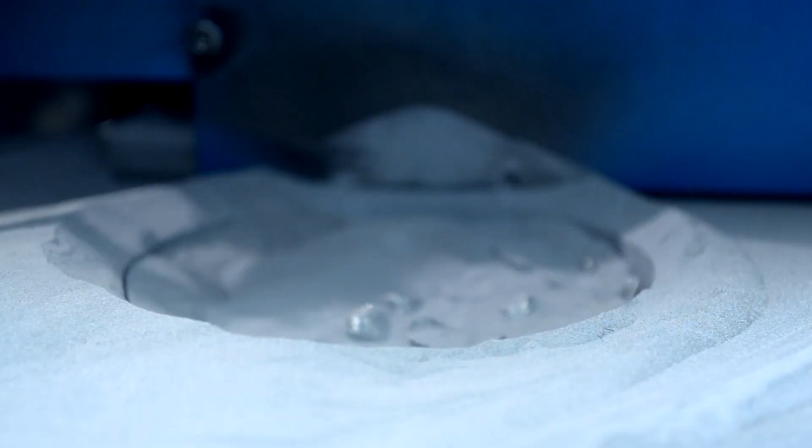Pittsburgh, the Steel City, once the epicenter of American steel production, with countless mills and foundries lining the city's landscape. It was the largest steel producer in the world. But the days of heavy industry have given way to a new era of innovation, and modern technologies are blossoming.

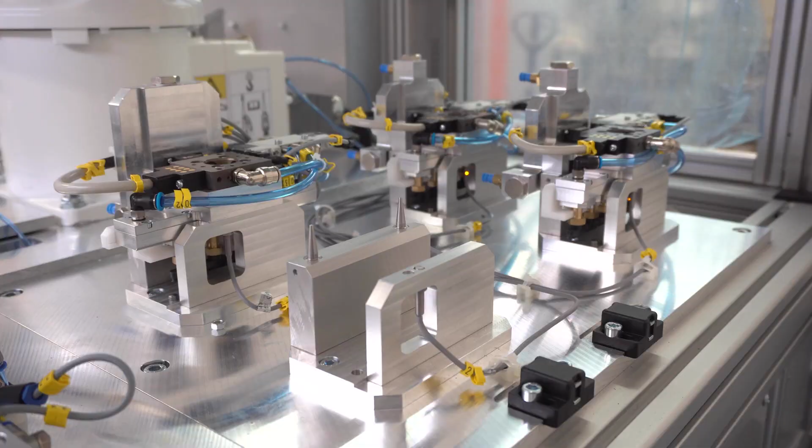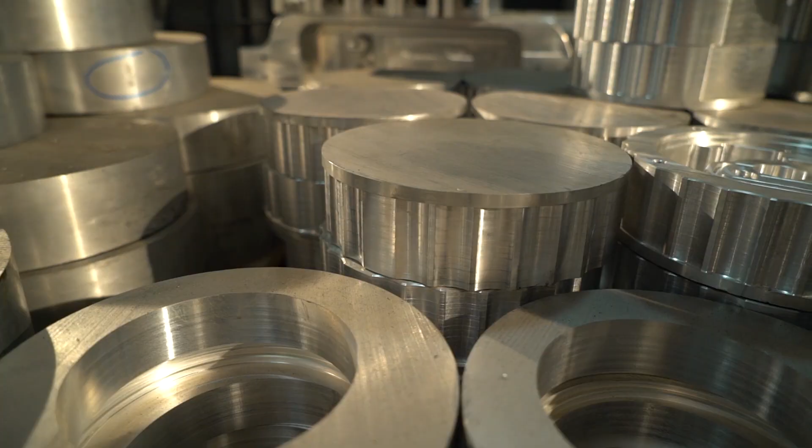Just like those early days of the steel industry in Pittsburgh, today's cutting-edge innovations are characterized by innovation and hard work. Backbreaking labor has been replaced with computer-aided sustainable technological advancements in manufacturing, utilizing novel design freedom that has enabled concepts to come to fruition.

Ladies and gentlemen, we proudly present several cutting-edge innovations that are the winners of the 2024 Powder Metallurgy Design Excellence Awards competition, sponsored by the Metal Powder Industries Federation. Let's start with the awards of distinction.

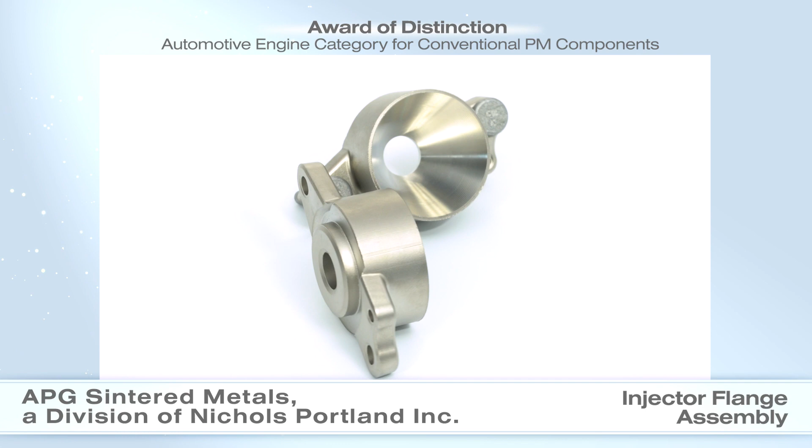APG Sintered Metals, a division of Nichols Portland Incorporated, received an award of distinction in the automotive engine category for conventional PM components for an injector flange assembly. This diesel exhaust fluid injector flange assembly is used in a mid-size pickup truck to reduce the amount of nitrogen oxide gas exiting the tailpipe.

Austenitic 304 stainless steel was selected for its combined good corrosion resistance and weldability. Due to the low compressibility of the powder, the parts are sintered at 1350 degrees Celsius in hydrogen to reach the final 7.0 grams per cubic centimeter density. Minor machining is required on the inner diameter and conical counterbore. After welding, the assembly does not leak when under pressure.

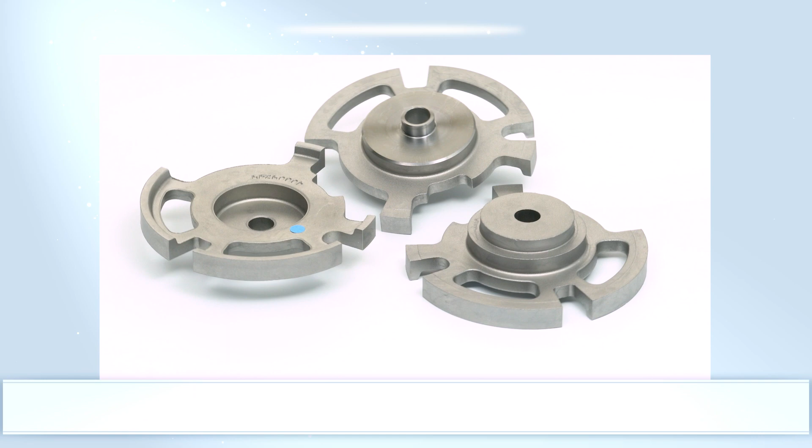AAM St. Marys Manufacturing Facility received an award of distinction in the automotive engine category for conventional PM components for a camshaft position sensor exciter wheel. Mounted on the camshaft of full-size pickup trucks and sport utility vehicles, the position sensor exciter wheel assists the cam sensor to input data to the engine control module to determine the camshaft position and velocity.

The FY-4500 iron phosphorus alloy has good magnetic properties, and only a turning operation is required to create the precision, thin-walled mounting hub and face. The PM process has better material utilization and precision compared with stamping, and the parts are acceptable for recycling as they do not contain copper.

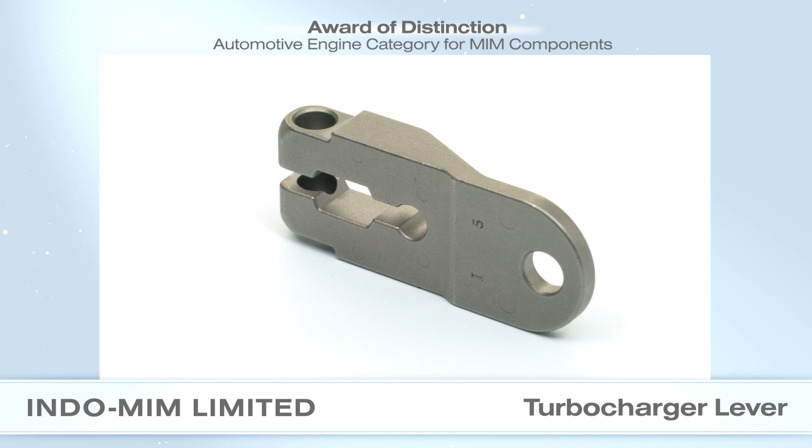Indo MIM Limited received an award of distinction in the automotive engine category for MIM components for a turbocharger lever. This lever is used as a gas flow controller in the turbocharger of an internal combustion engine. Originally specified as an HK30 austenitic stainless steel, the parts are made using MIM 17-4 PH precipitation hardening stainless steel and proved satisfactory for the application that requires corrosion resistance and high temperature properties.

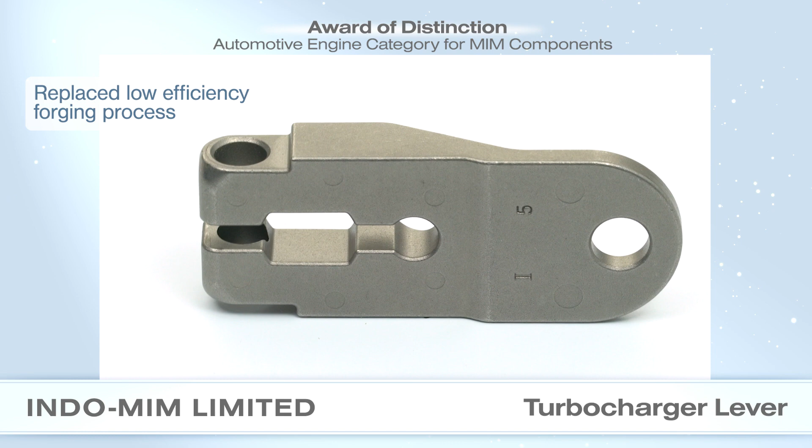MIM processing reduced lead times and was able to produce the high volume of parts needed weekly by the customer, while significantly reducing waste material compared with the forging process.

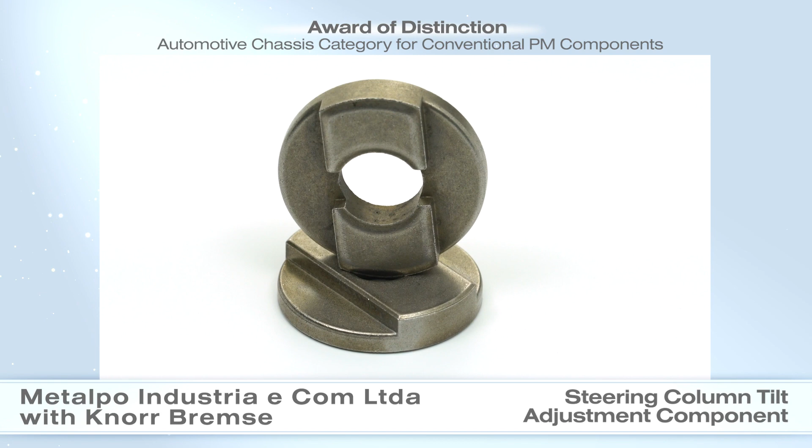Metalpo Industria e Comercio Ltda and customer Knorr-Bremse received an award of distinction in the automotive chassis category for conventional PM components for a steering column tilt adjustment component. Understanding the application to define the best fit between geometry, process, and requirement enabled a best cost benefit for this truck steering column tilt adjustment component.

When the carbonitrided PM part was unable to meet the dimensional tolerances, the material, design, and process were changed to a sinter-hardened FLC-4908 component with a density of 7.0 grams per cubic centimeter. Changing from traditional carbonitriding to sinter hardening reduced the carbon dioxide emissions by 156 kilograms.

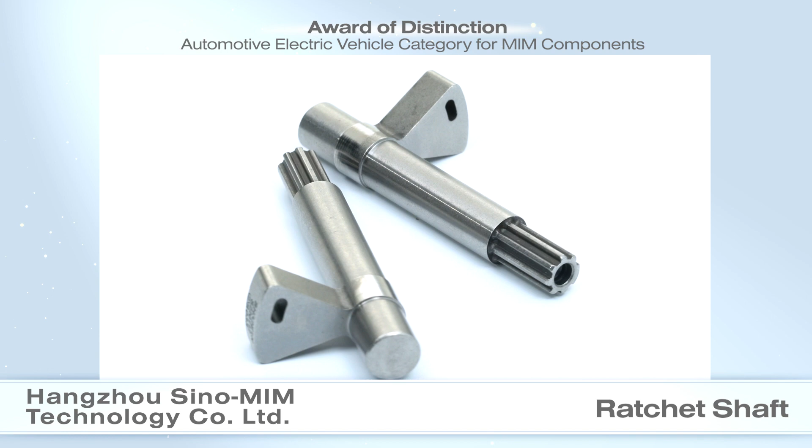Hangzhou Sino MIM Technology Company Limited received an award of distinction in the automotive electric vehicle category for MIM components for a ratchet shaft. Used in the parking brake system for new electric vehicles, the ratchet shaft engages a cam to lock the disc brake when parked.

The chromium molybdenum alloy steel has a tensile strength of 1400 megapascal and a yield strength of 1200 megapascal. Although the ratchet shaft requires minimal machining, the MIM part resulted in a 20% cost saving compared with a fully machined component.

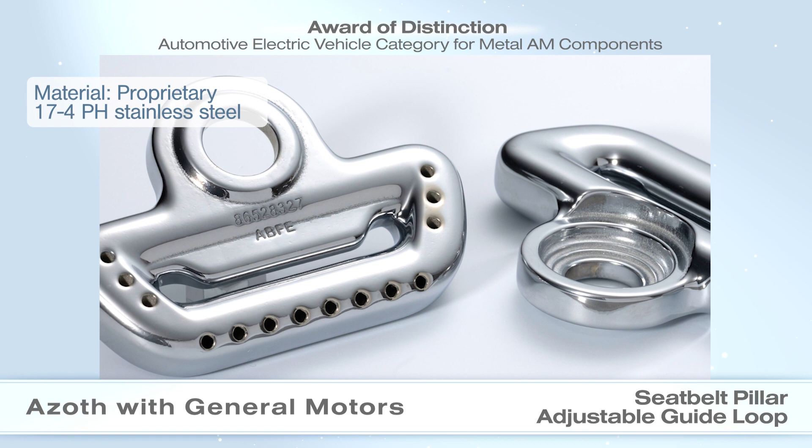Azoth and customer General Motors received an award of distinction in the automotive electric vehicle category for metal AM components for a seatbelt pillar adjustable guide loop. This seatbelt pillar adjustable guide loop was designed with binder jet AM processing in mind and includes a complex internal channel to reduce mass and material waste.

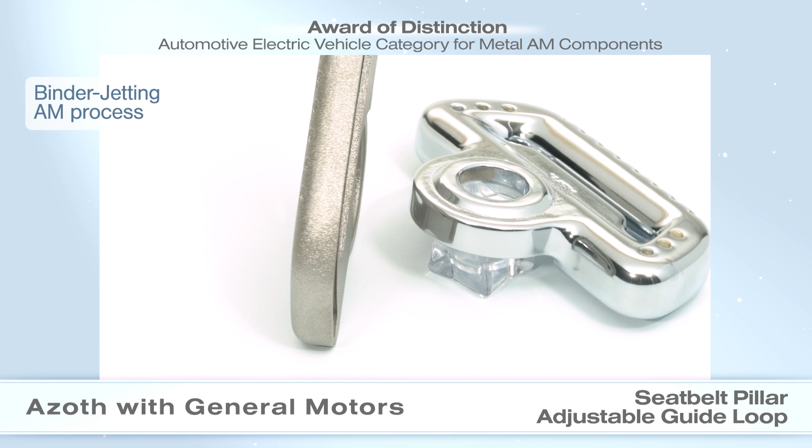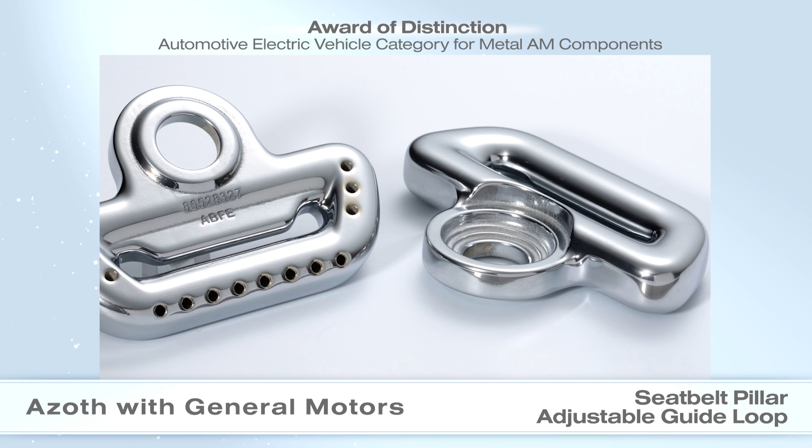The surface of the parts is semi-automatically polished prior to a multi-layer bright nickel chrome plating operation to improve corrosion performance and provide a hard, scratch-resistant surface. Parts are tested for cyclic corrosion resistance, thermal shock resistance, perspiration resistance, and resistance to cleaning agents. Prior to using AM processing, the component was an assembly of 4 separate parts.

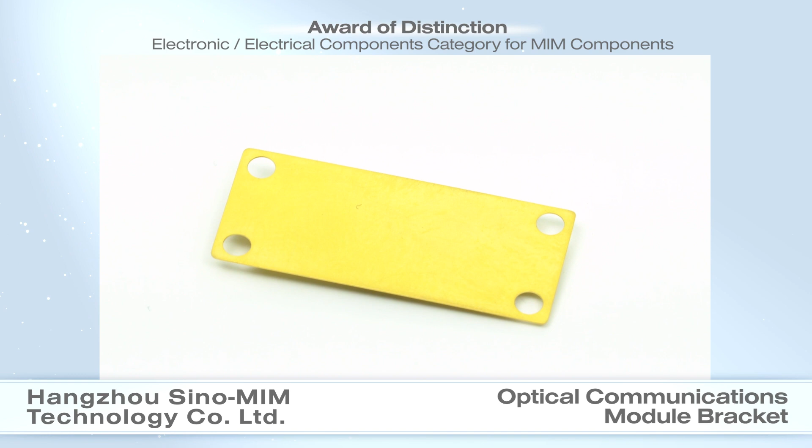Hangzhou Sino-MIM Technology Company Limited received an award of distinction in the electronic/electrical components category for MIM components for an optical communications module bracket. Used as a heat dissipation module in an optical communication 5G base station, numerous heating components are mounted on the bracket surface, which serves not only as the mounting base, but also conducts and dissipates heat.

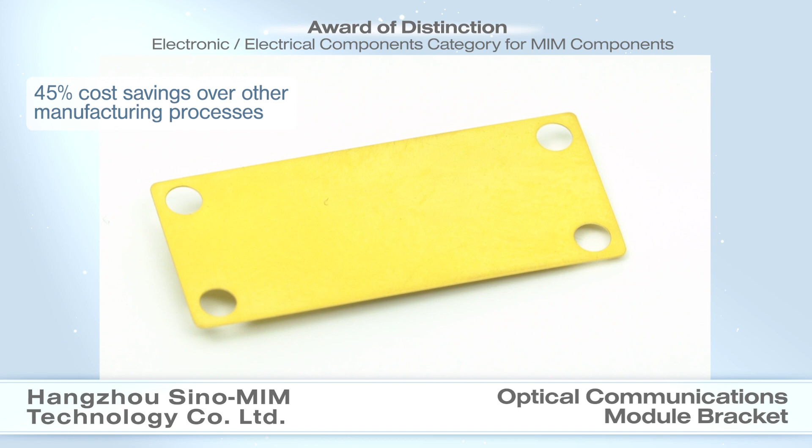This ultra-thin base plate has a flatness requirement of less than 0.03 millimeters. MIM processing cut the product cycle time for this electroplated 50-50 copper tungsten bracket while reducing the cost by 45%.

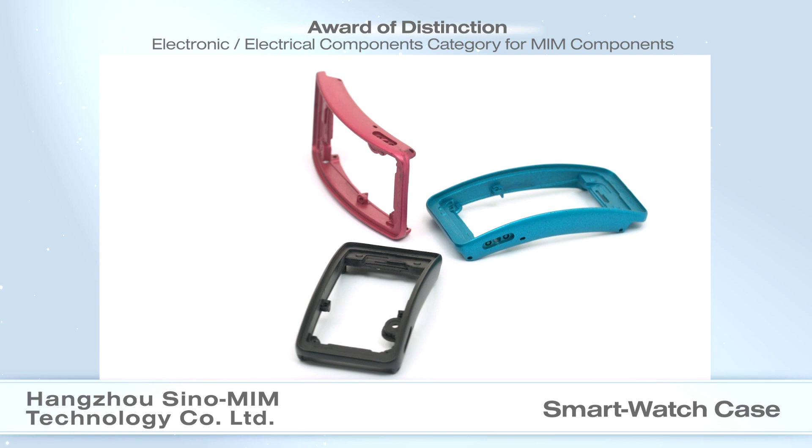Hangzhou Sino-MIM Technology Company Limited received an award of distinction in the electronic/electrical components category for MIM components for an aluminum alloy smartwatch case. The thin, complex sections of this aluminum alloy smartwatch case require use of a high-fluidity feedstock and a high-speed molding machine.

The curved surface of the watch cases necessitates manual polishing to a mirror finish, and the parts are anodized to various colors. The light weight of the aluminum alloy case, compared with ones made using stainless steel, is a significant benefit. The MIM technology has high material utilization and the advantages of lower cost over machining.

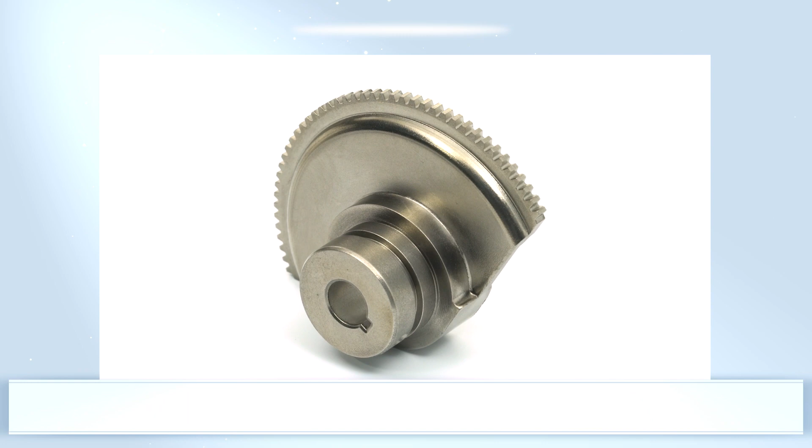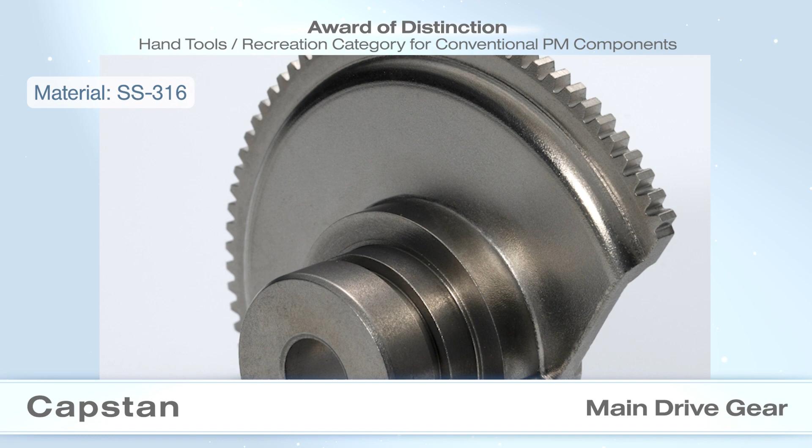Capstan received an award of distinction in the hand tools recreation category for conventional PM components for a main drive gear. This 316 stainless steel main drive gear is used in a throttle system with a stack-up of 3 stainless steel PM-driven gears. The compaction process achieved about 60% of the final shape of the part, and secondary CNC lathe

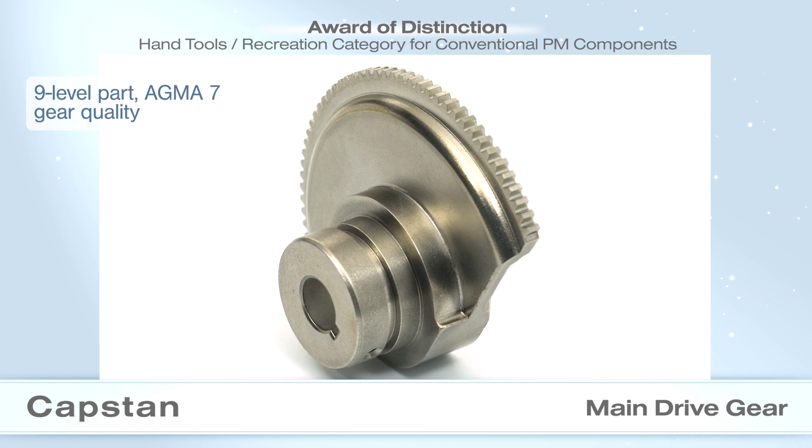turning and milling operations were used to achieve the bore depths, hub diameter, groove, and tapped hole. The PM part had a keyed form built into the compaction tooling, a distinct advantage compared with the previously machined wrought component. The finished gear is a 9-level part, made to an AGMA 7 quality level.

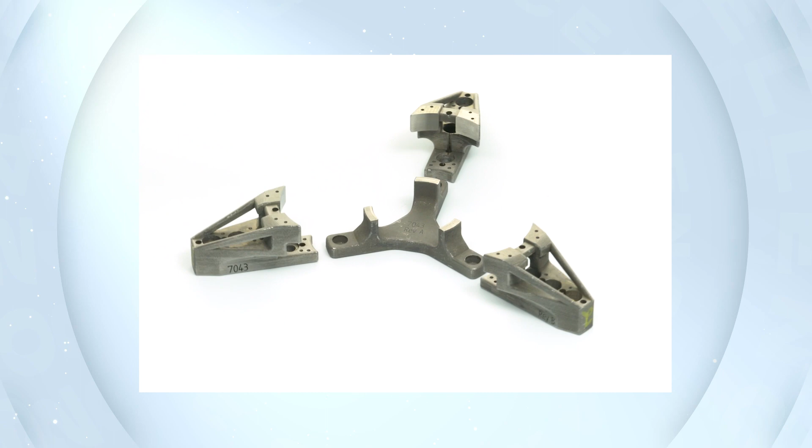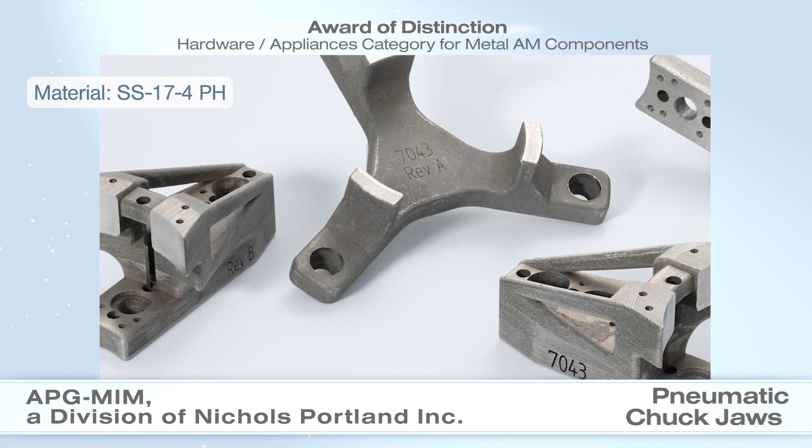APG MIM, a division of Nichols Portland Incorporated, received an award of distinction in the hardware appliances category for metal AM components for pneumatic chuck jaws. Compared with traditional work-holding chuck jaws, these lightweight jaws offer an 84% reduction in rotating mass and a fraction of the centrifugal force that the pneumatic chuck must overcome at full rotational speed. The lower centrifugal force requires a clamping pressure roughly a third of what a traditional chuck would require.

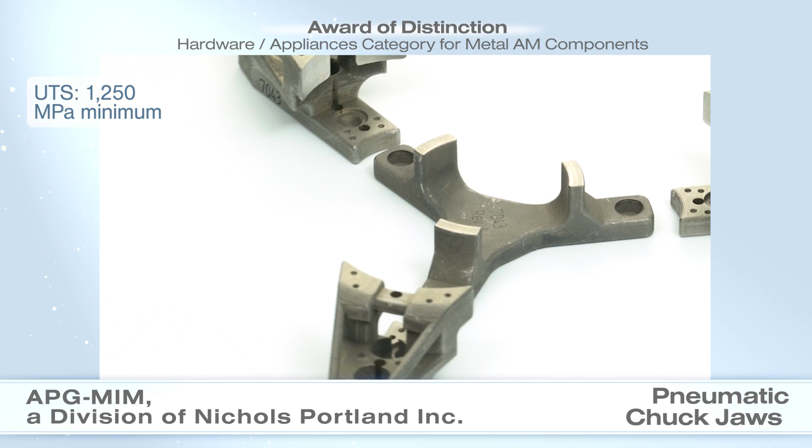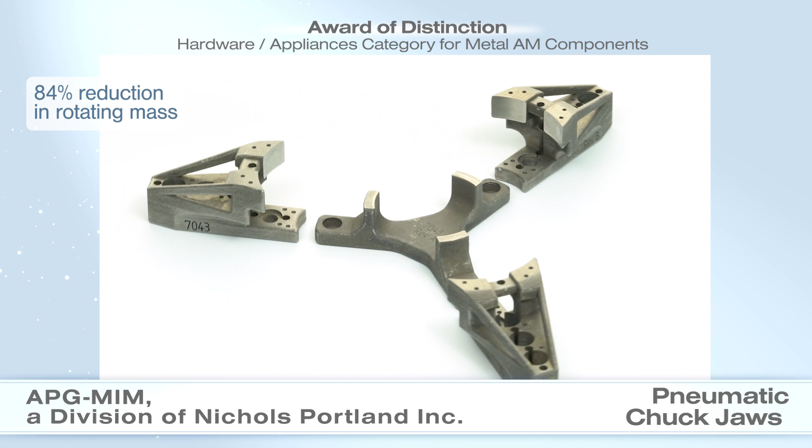Made using the material jetting process, the inner lattice structure is formed without having to depowder, eliminating the risk of free powder entrapment. The process generates little waste, and the wax used to form the mold is recovered and can be reused for a future build.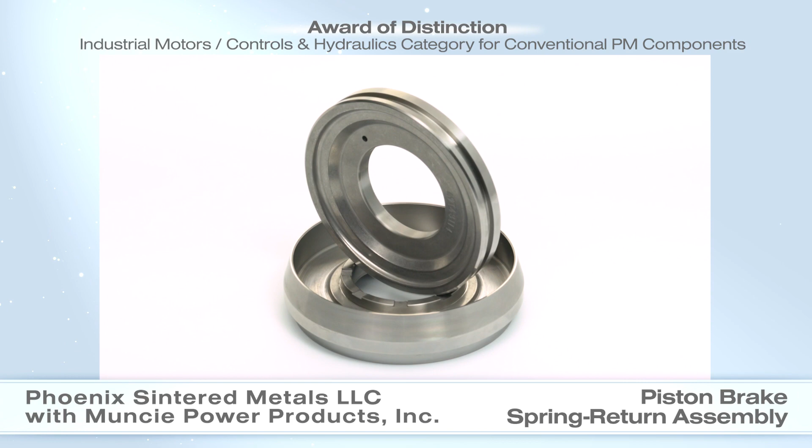Phoenix Sintered Metals LLC and customer Muncie Power Products Incorporated received an award of distinction in the industrial motors, controls, and hydraulics category for conventional PM components for a piston brake spring return assembly. Used in a power takeoff system in work truck applications, this unique design piston brake spring return assembly engages the clutch pack under pressure, and the taper feature acts as a brake when disengaged.

Both the piston and piston cup are made from FN0208 at a density of 6.9 grams per cubic centimeter. The ability to form the tone ring feature on the inner hub of the piston was a feature not available on the prior part design that was machined from bar stock, resulting in excessive scrap and machining cost.

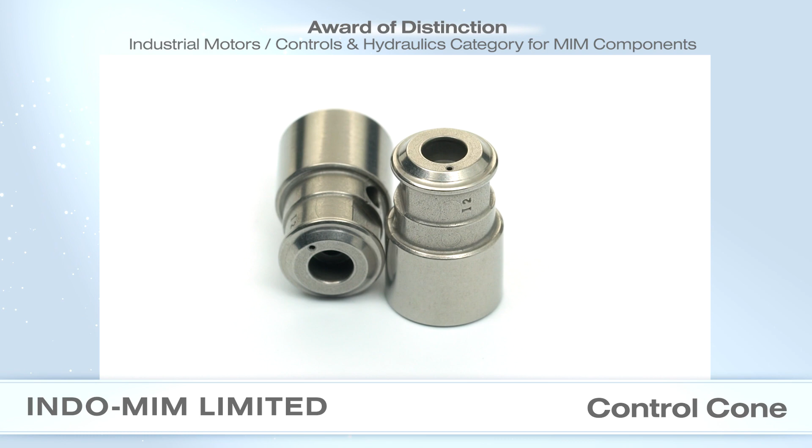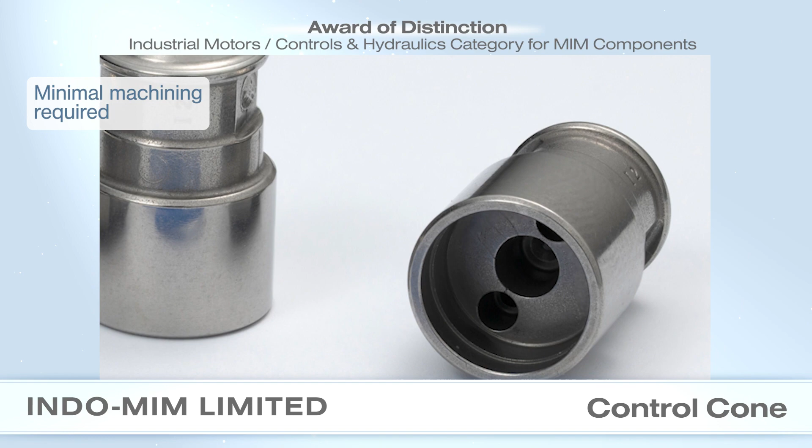Indo MIM Limited received an award of distinction in the industrial motors, controls, and hydraulics category for MIM components for a control cone. This control cone acts as a fluid controller in a fuel pump. Made with AISI 9310 low alloy steel, the intricate profiles of the part have tight tolerances that were difficult to maintain when produced by machining, and much more costly. Repeatability and precision are key attributes of the MIM process, along with high volume manufacturing and shorter lead times when compared with the machining process.

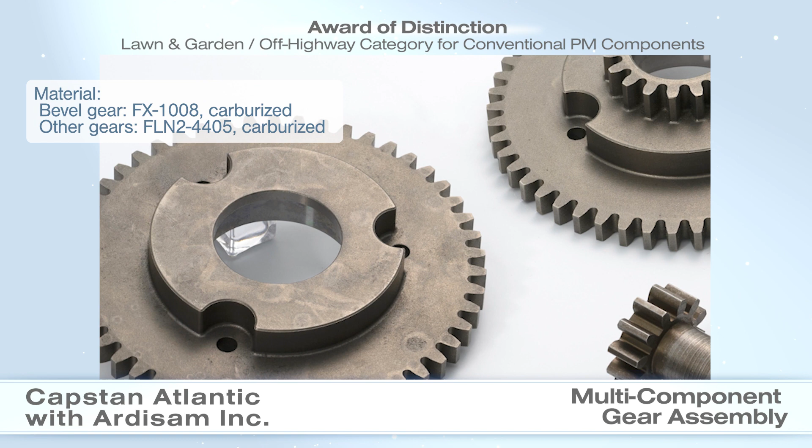Capstan Atlantic and customer Ardisam Incorporated received an award of distinction in the lawn and garden off-highway category for conventional PM components for a multi-component gear assembly. 7 different gears are used in the assembly of the transmission for a rear-tine garden tiller. 6 gears are made using FLN2 4405, and the 7th, a bevel gear, is made using a copper-infiltrated PM

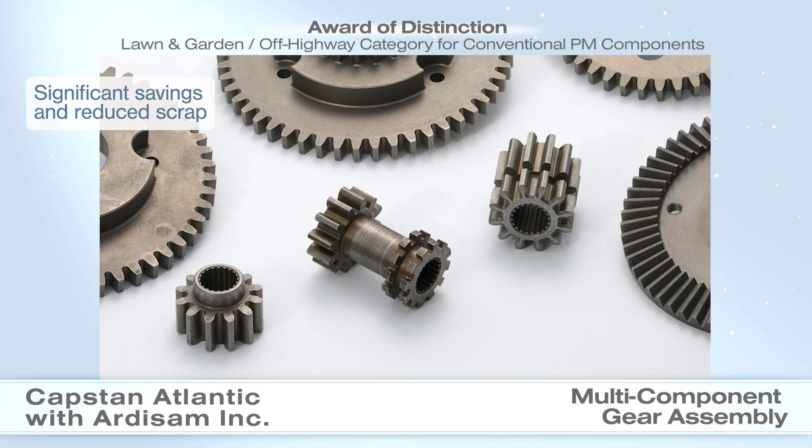steel. All are carburized. A special heat treatment cycle was developed to maintain hardness, but also maximize ultimate tensile strength and impact energy. The conversion of 7 gears from wrought steel to PM reduced the amount of scrap produced by machining and had significant cost savings.

Metco Industries Incorporated received an award of distinction in the medical dental category for conventional PM components for a latch lock assembly. 2 distinct PM components are required for this 9-part assembly that is used in a heavy-duty hospital bed rail lock latch assembly. The latch lock lever is made using FC0208 and requires controlled density on the ramp, which is a critical wear zone. After sintering, the levers are milled, heat-treated, and zinc-plated.

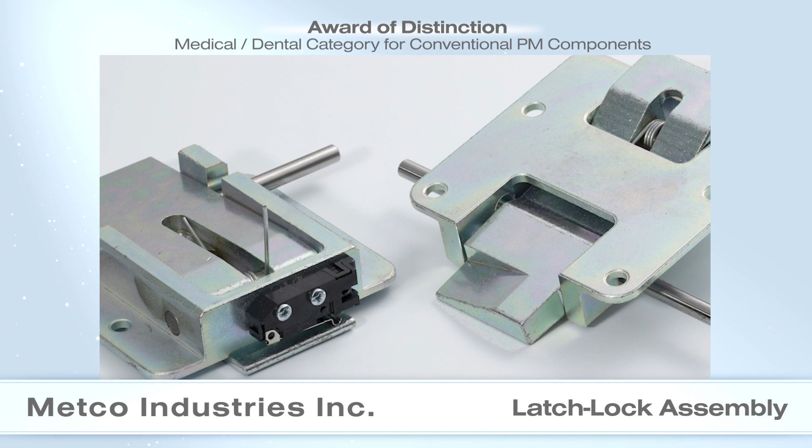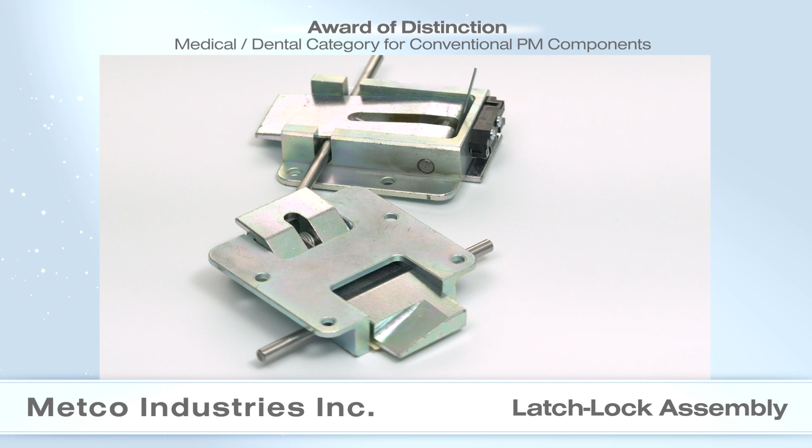The saddle parts are a copper-infiltrated PM steel, providing a safety factor for strength and wear resistance, and zinc-plated to provide a sterile surface unlikely to absorb contaminants in a hospital environment.

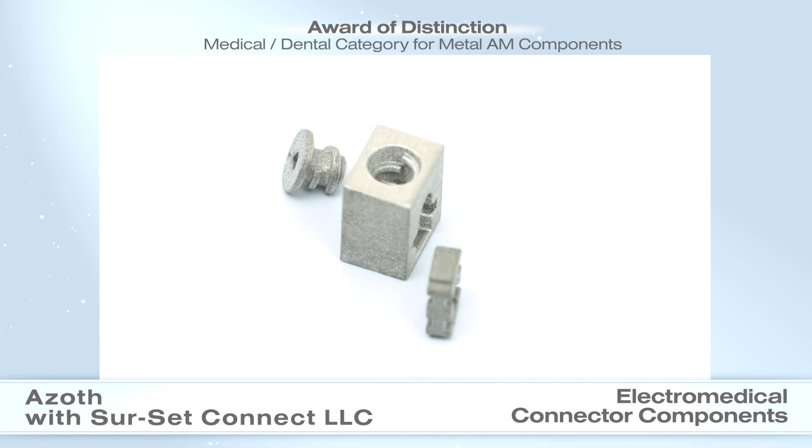Azoth and customer Sur-Set Connect LLC received an award of distinction in the medical dental category for metal AM components for electromedical connector components. These electromedical connector components, a set screw block and a spring housing, mate with the associated catheter and provide mechanical feedback to the surgeon, ensuring proper insertion of the catheter in the patient.

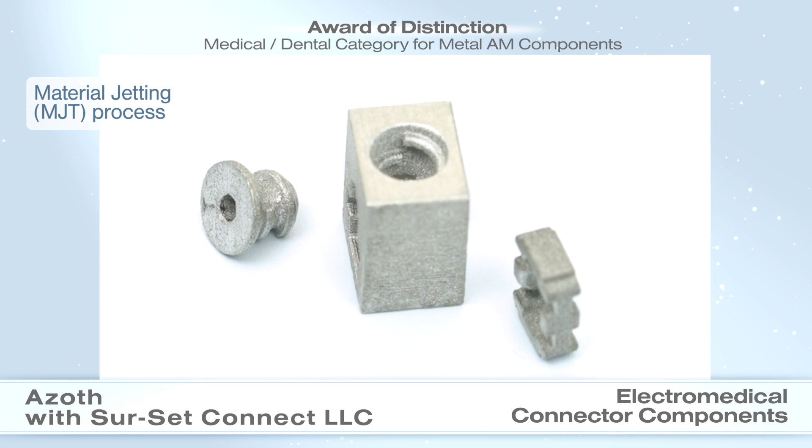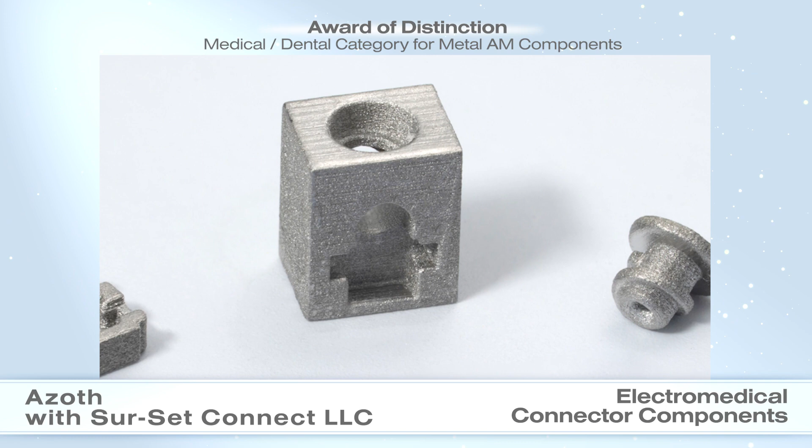The material jetting process was selected for the 316 stainless steel parts to meet the complexity, high resolution, and good surface finish that was required. It also enabled the manufacturer to test and evaluate multiple design variations quickly, making it easier to identify and rectify design characteristics and performance improvements.

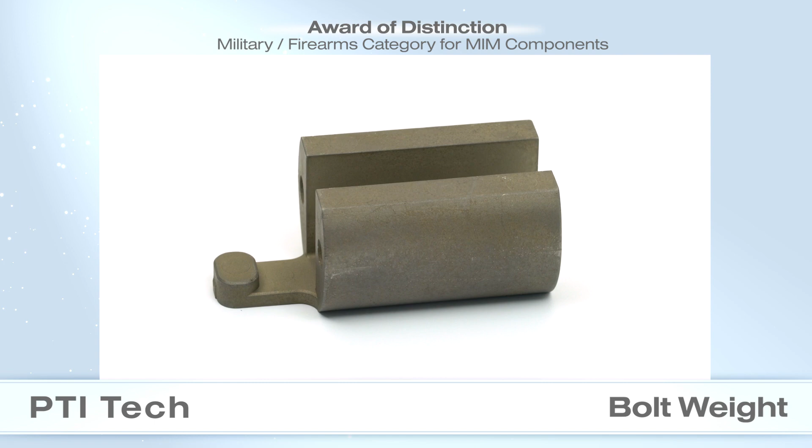PTI Tech received an award of distinction in the military firearms category for MIM components for a bolt weight. To reduce the raw material cost for this tungsten heavy alloy inertia weight in a bolt assembly for a blowback firearm, MIM was selected as the solution. A 95% weight tungsten alloy was selected to result in a relative density of more than 18 grams per cubic

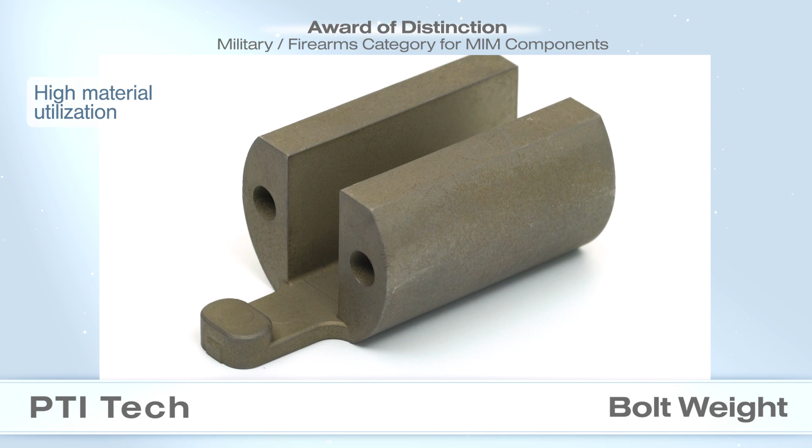centimeter. Sacrificial support ribs were added to mitigate sintering distortion and were CNC machined from the final part. Machining the part from bar stock would have resulted in over 70% scrap, considering an 1,100 gram bar stock would be machined to a 250 gram finished part.

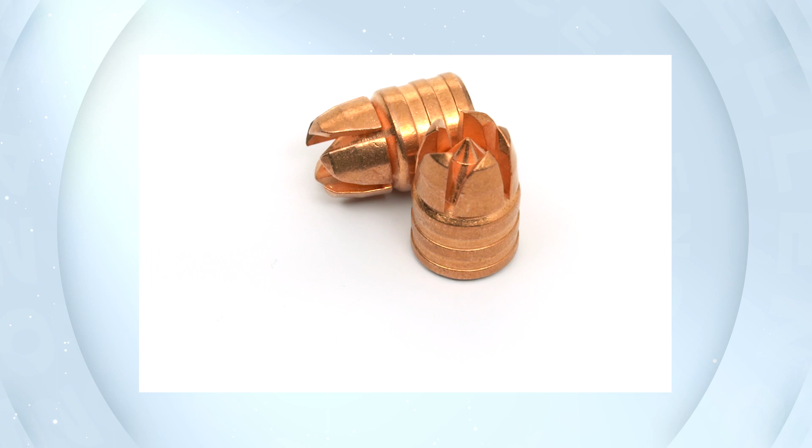ARC Group Worldwide and customer Halo Ammunition received an award of distinction in the military firearms category for MIM components for a .45 caliber bullet. This .45 caliber bullet is a solid copper projectile that uses a feedstock that contains 99.8% copper, along with a proprietary binder formulation to ensure even and complete sintering with minimal distortion.

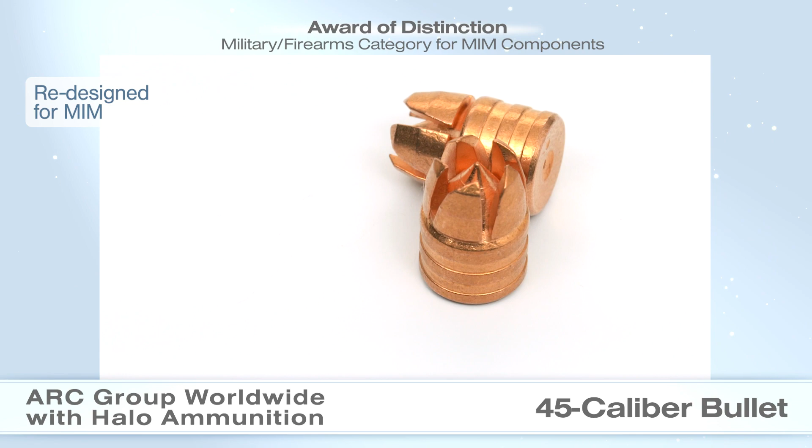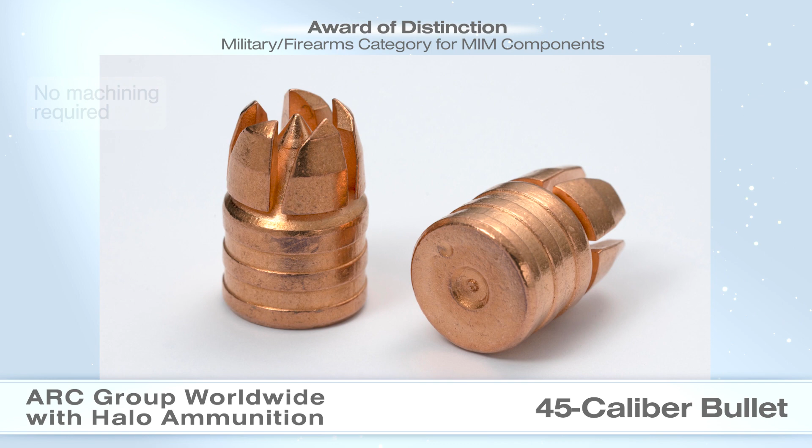The petals were redesigned for better suitability in injection molding. The part sinters to 96% relative density with minimal distortion. Machining is not required, and scrap from tool setup can be recycled.

Ladies and gentlemen, these are the winners of the Awards of Distinction in the 2024 PM Design Excellence Awards competition. Please join us in acknowledging their achievements as company representatives accept their awards.